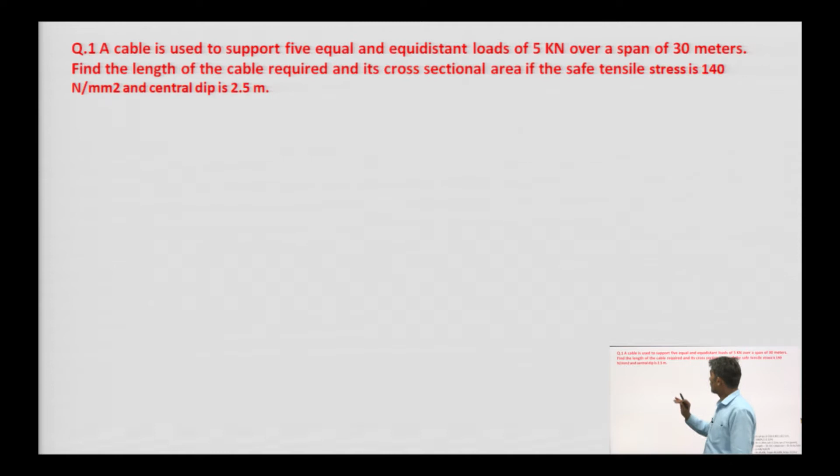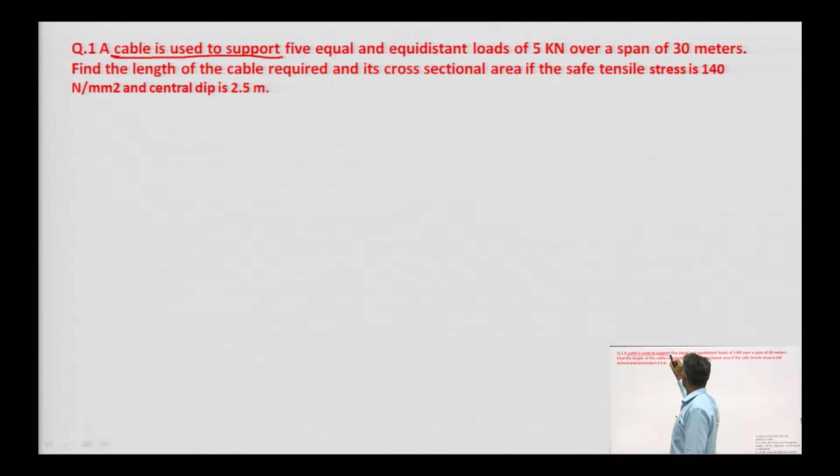In my today's lecture on the subject Structure Analysis, under the topic of analysis of cable, we will solve questions based on this topic. So, the first question of today's session is: a cable is used to support 5 equal and equidistant loads of 5 kilonewton over a span of 30 meter.

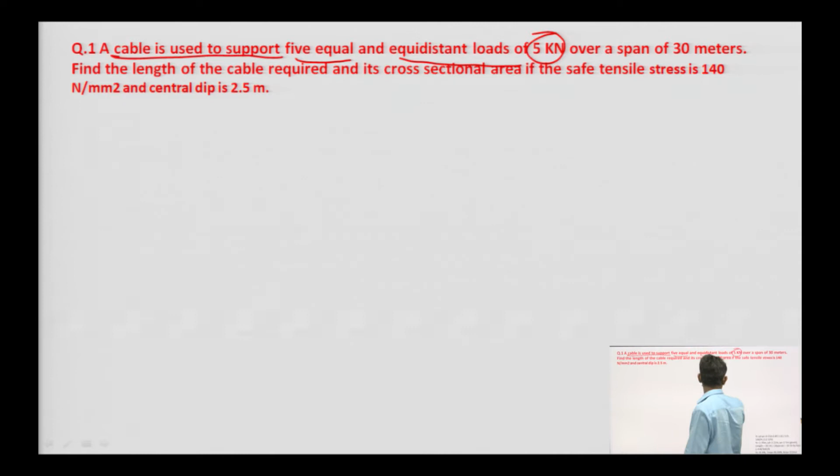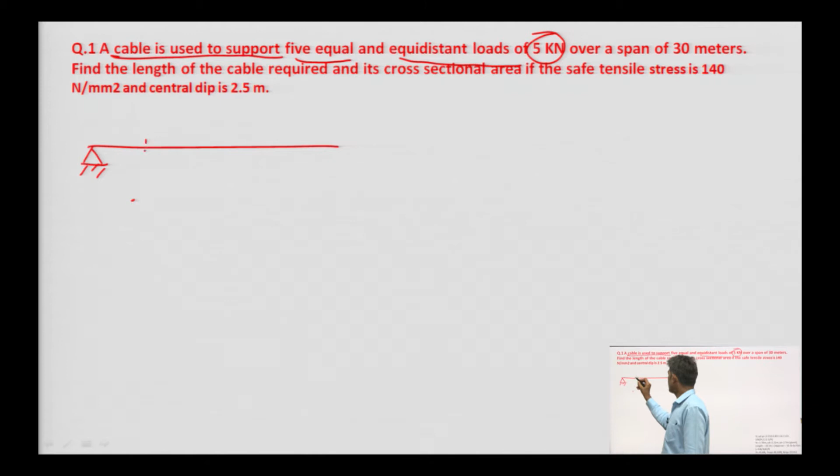Okay, over a span of 30 meters means we have a horizontal length, 1 2 3 4 5. This total length is how much? 30 meter. So, the value of every segment will be how much? 5 meter, 5 meter, 5 meter, 5 meter, 5 meter, 5 meter.

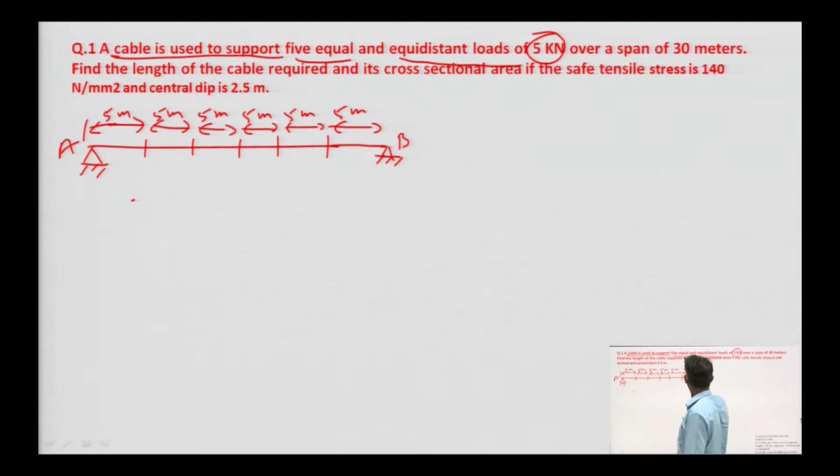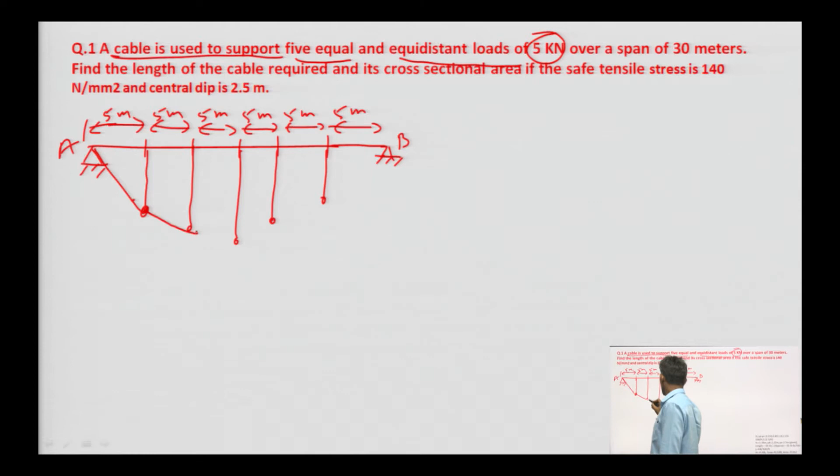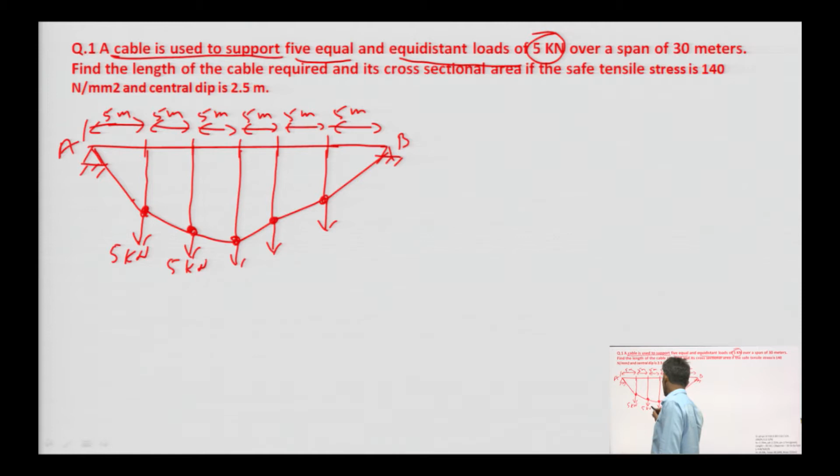So, at these points, 5 equidistant loads means first load, second load and third load. So, these are the loads which are hanging in this cable. So, this will be the shape, and the loads are 5 kilonewton each. So, this is the cable, location of the cable.

Find the length of the cable. We need to find the length of the cable for this arrangement of the loads. Say this is point A, B, suppose this point is C, this point is D, this point is E, F, G. So, what we need to find? The length of cable is equal to AC plus CD plus DE, multiplied by

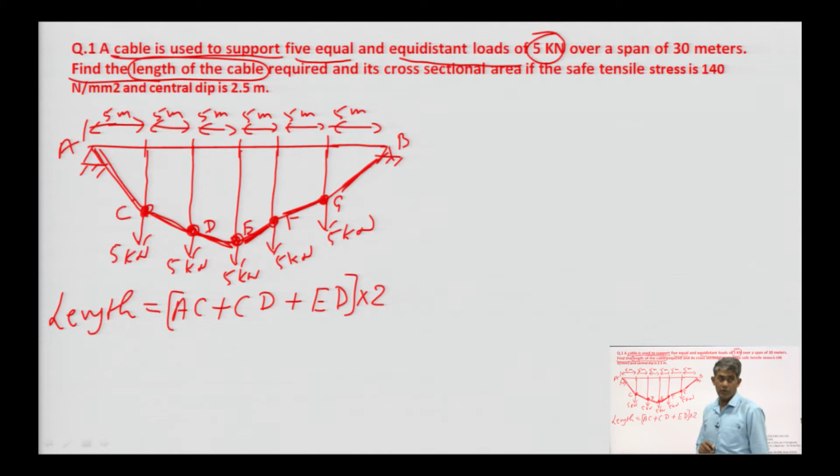2, because this one length will be same as for DE, and this one will be same as length CD, and so on. So, we need to find the values AC, CD and DE. The value of AC can be calculated if we can calculate this dip, suppose this is dip YC. So, AC will be under root of horizontal distance 5 square plus YC square. If we calculate YC, then the length AC can be calculated.

Similarly, what will be the value of CD? Value of CD will be under root of 5 square plus this one distance. Suppose this total length is YD. So, this one length will be YD minus YC, whole square. So, this will be the length of CD.

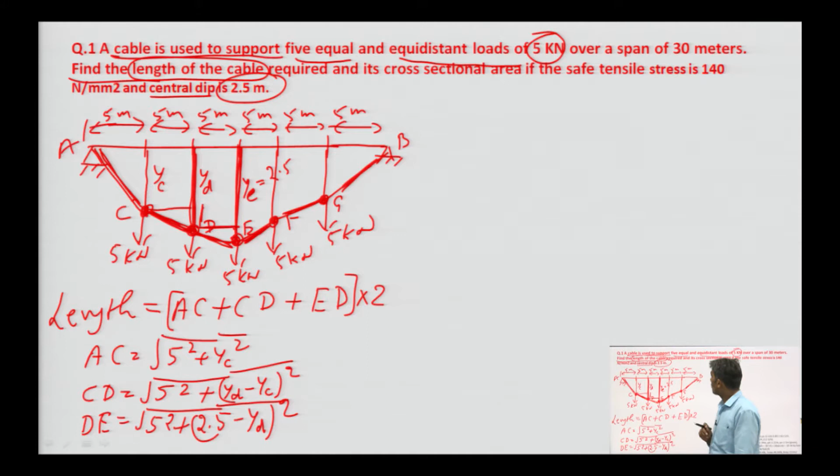Similarly, the length of DE will be under root of 5 square plus this difference. Suppose this entire length is YE, and this value YE is given in the question: 2.5 meter, the central dip. So, this is 2.5 minus YD, whole square. So, the length of the cable can be calculated if we know the values of YC and YD.

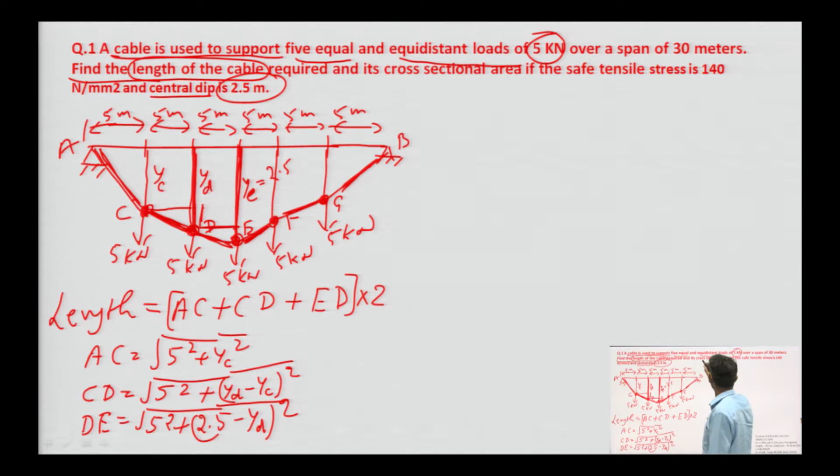After calculating its length, what we need to calculate here? Find the length of the cable required and its cross sectional area, if the safe tensile stress is 140 Newton per mm square. Let us first calculate the length of the cable.

We know that the bending moment at point C, D, E, F, G, or we can say at any point in the cable, is 0. So, we will apply bending moment at point C equal to 0, taking the left part. We will consider only this left part.

Here what will be the reaction? The vertical reaction VA, horizontal thrust H, and vertical reaction VB. VA and VB will be equal because it is symmetrical, and the total load is 5 loads of 5. So, 5 into 5 divided by 2 is 12.5 kilonewton. This is the vertical reaction at support A and support B.

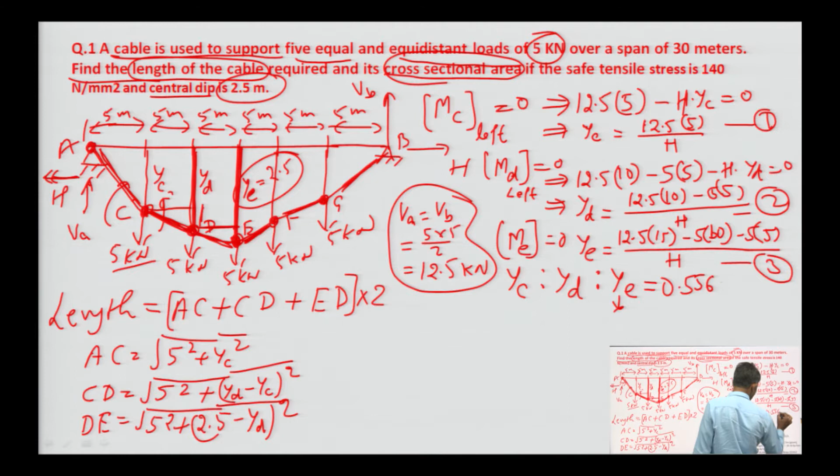So, we can calculate the ratio of yc to yd to ye with the help of these three values. H will be cancelled out. Actually, the value of ye is known to us, so this component we need to take as 1. With reference to that, we will have 0.556 is to 0.89 is to 1. That ratio we will have with the help of these three values.

With this equation, the values of yc and yd are known to us. It is very simple. Value of yc will be what? Because this is 1, ye is known to us, 2.5, multiplied by the ratio of yc. So, it is 0.556 divided by 0.556 plus 0.89 plus 1. And this gives 1.39 meter.

Similarly, the value of yd can also be calculated with this proportion, and the yd value is 2.22 meter. So, the value of yc is known to us, the value of yd is known to us. So, the values of AC, CD, DE are known, and by putting the calculated values of AC, CD, DE in this equation, we will get the total length of the cable, and that length will be 30.54 meter. So, this will be the length of the cable.

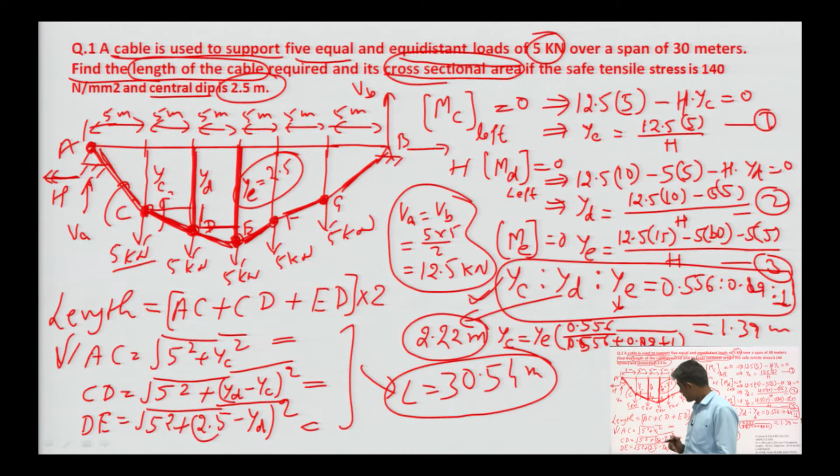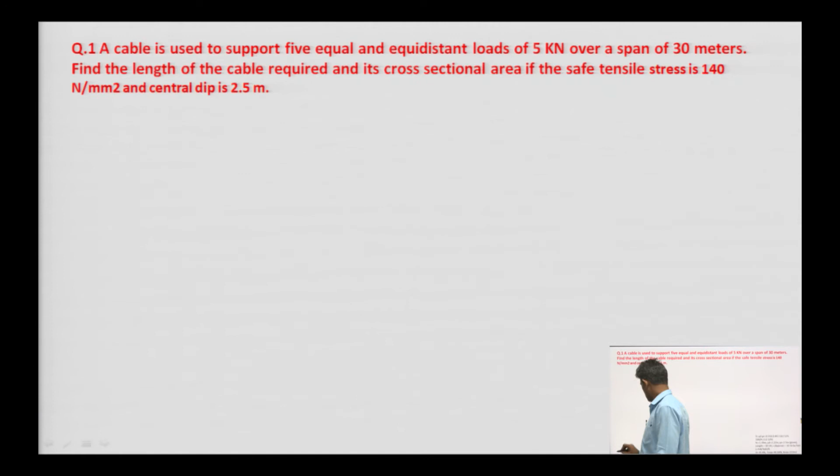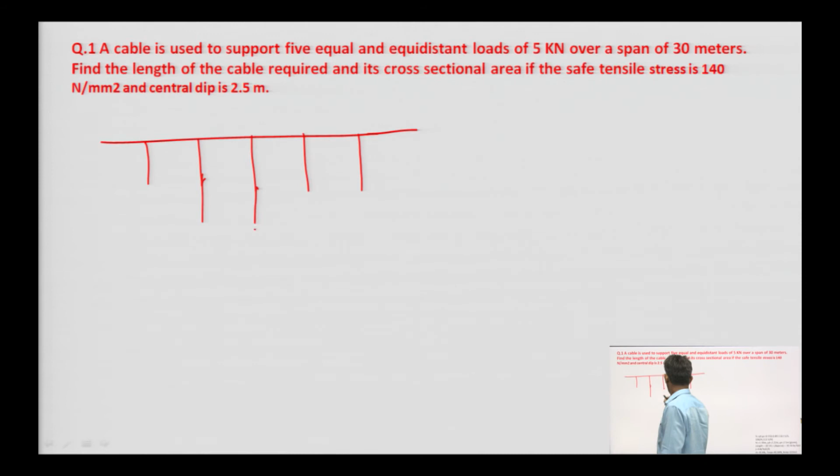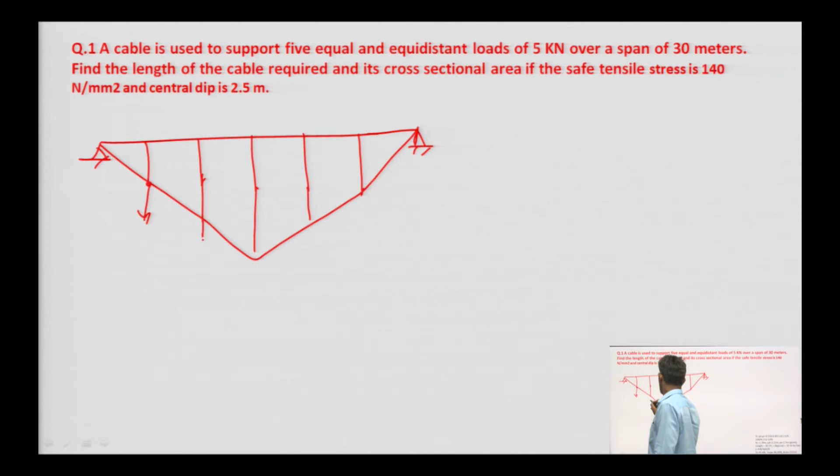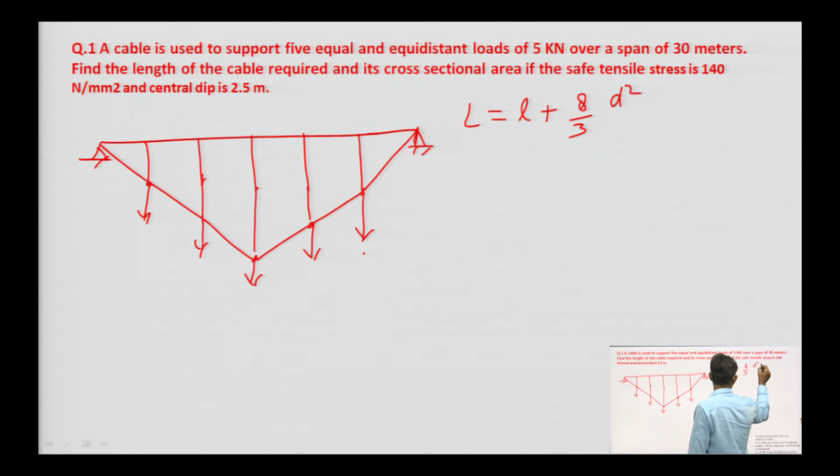So, length can also be calculated with the help of the formula. What is the formula? Length of cable is L plus 8 by 3 d square by L. This was yd. Now, this was A, B, C, D, E. So, this is ye, ye is 2.5. Taking d as ye, 2.5 meter, taking L as 30 meter, this value can also be calculated.

If this is calculated, it is 30.56 meter. So, without calculating the values yc, yd, we can have an idea of the length of the cable.

30.56, and prior to that we have calculated the value as 30.54. Okay, it is near about the same as we calculated previously. Okay, so use this formula.

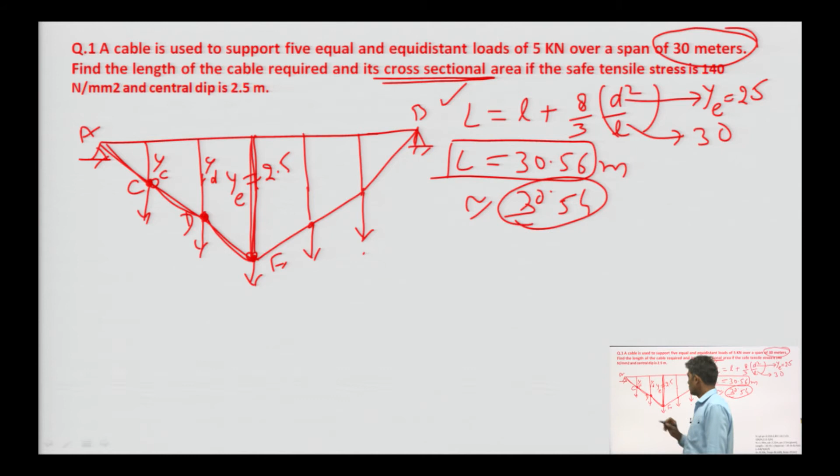The next thing which we need to calculate in this question is the required cross sectional area. So, reaction VA we have calculated as 12.5, this one 12.5. So the next thing is to calculate the value of H. To calculate the value of H, we can apply the equilibrium equation at point C. So, bending moment at point C equal to 0, which we applied previously. So, the value of H can be calculated from equation number 1.

What was that equation? That was 12.5 multiplied by 5 minus yc into H equal to 0. So, yc is known to us, yc has been calculated. So, the value of H can be calculated, and the value of H comes to be 45 kilonewton. By putting the value of yc, we will have the value of H as 45. Okay. H is 45 kilonewton. VA is 12.5 kilonewton.

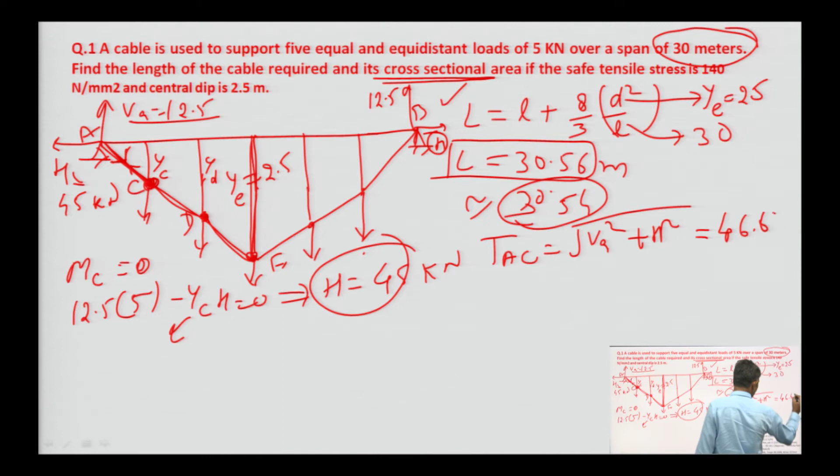So, the value of tension in cable AC can be calculated, and what will be the value? Tension in AC will be under root VA square plus H square. VA is known to us, H is known to us, then that value can be calculated, and that value is 46.6 kilonewton. Okay, you can calculate manually. And this value can be shown by this diagram also, means TA, tension at this support.

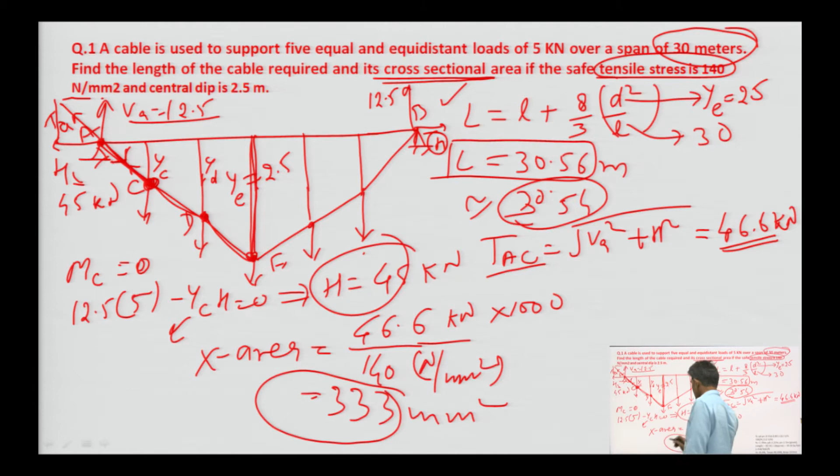And that value of the tension at support A will be the maximum. And in the question, the tensile stress is given as 140, and maximum tension has been calculated. Therefore, required cross sectional area can be calculated how? By dividing 46.6 kilonewton by 140 Newton per mm square. So, multiply here by 1000, then we will have the value as 333 mm square. So, this will be the required cross sectional area of the cable for hanging 5 equidistant loads of 5 kilonewton.

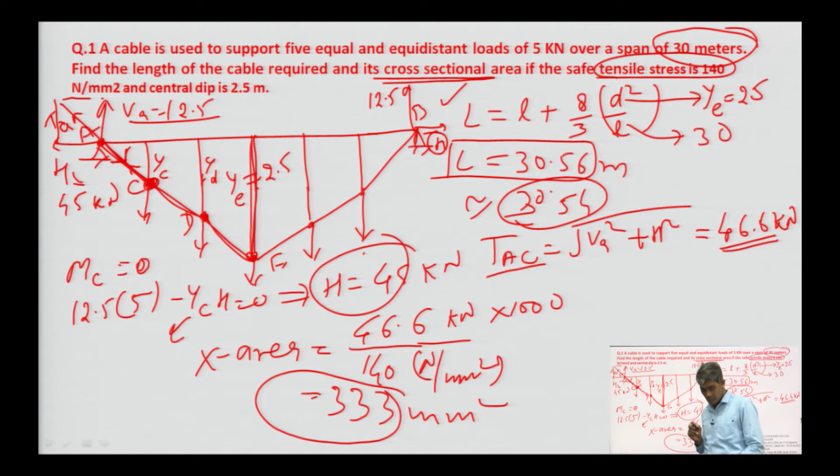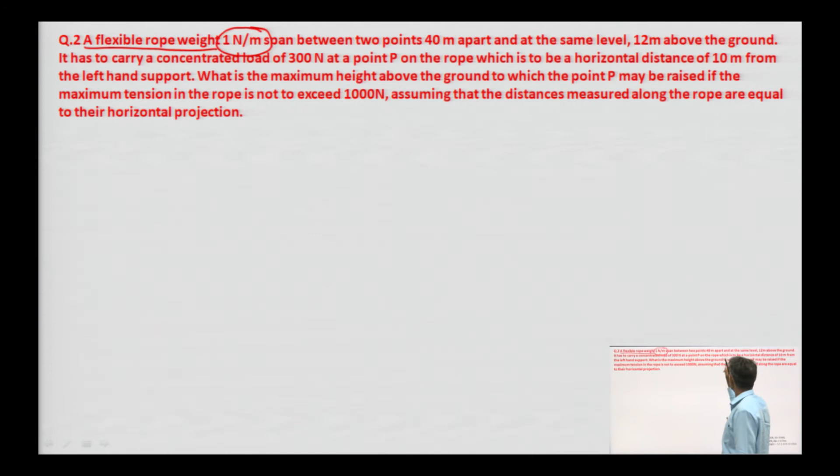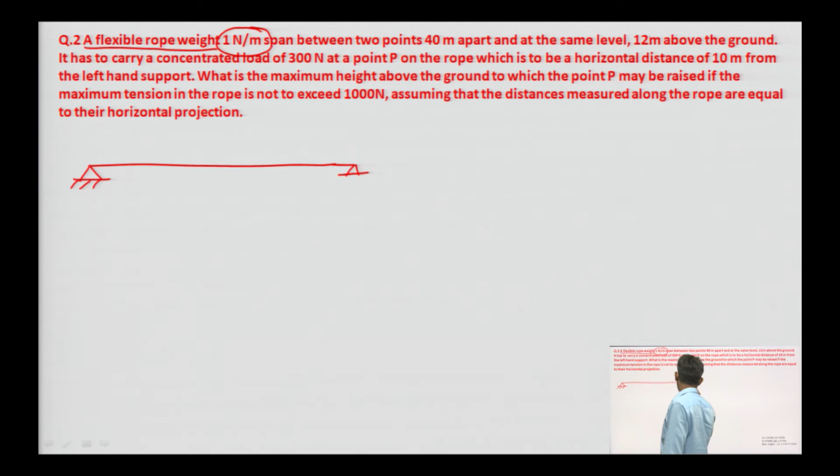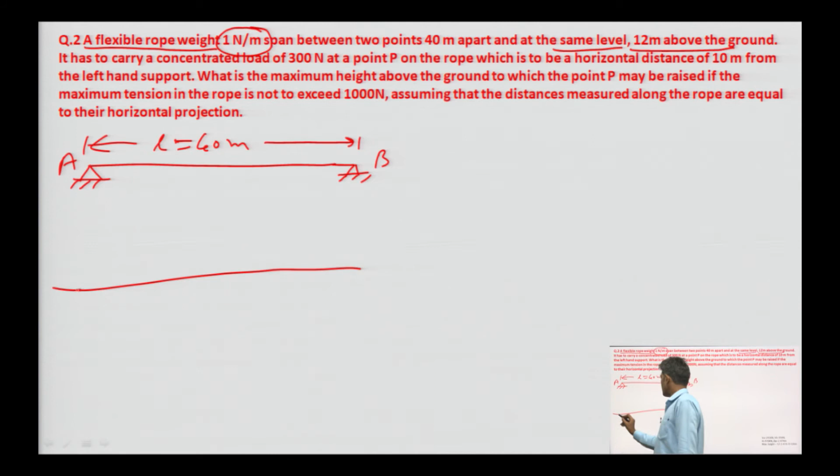Okay. We will move to the next question. In the next question, what is given? A flexible rope weighing 1 Newton per meter spans between 2 points 40 meter apart. Means the horizontal distance between the cable supports is given to us, L is equal to 40 meter, and at the same level. So points A and B are at the same level, 12 meter above the ground. This is the ground, and this total height is 12 meter above the ground.

It has to carry a concentrated load of 300 Newton at a point P on the rope, which is to be at a horizontal distance of 10 meter from the left hand support. Means from A, a point load has to be placed. And the value of this load P is 300 Newton, and the horizontal distance is given as 10 meter. Okay.

What is the maximum height above the ground to which the point P may be raised if the maximum tension in the rope does not exceed 1000 Newton? Means T max is given to us as 1000 Newton. We need to find this height. Suppose this is a small h. So, is something else given? No. Okay. How can that value be calculated?

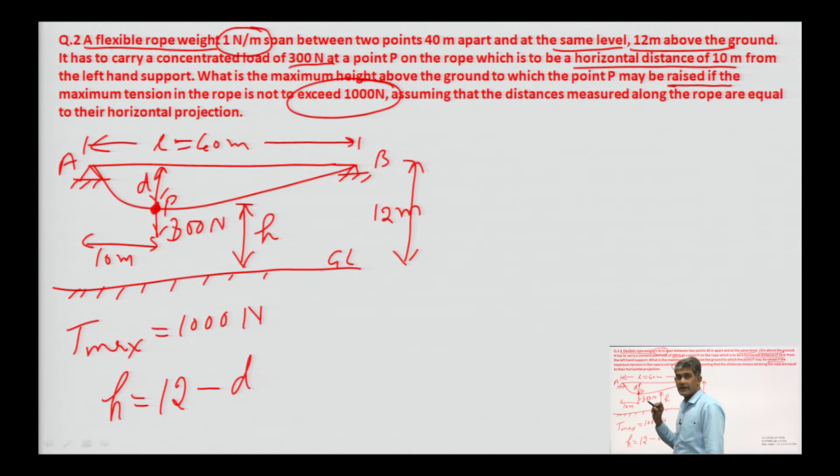So, the value of h can be calculated by the difference of 12 minus this central dip. If we are able to find the value of the dip at the point of concentrated load, then with the difference 12 minus d, we can calculate this height h, which is required in this question. So, which types of loads are there? First one is the point load, and the other is UDL, which is applied on this cable.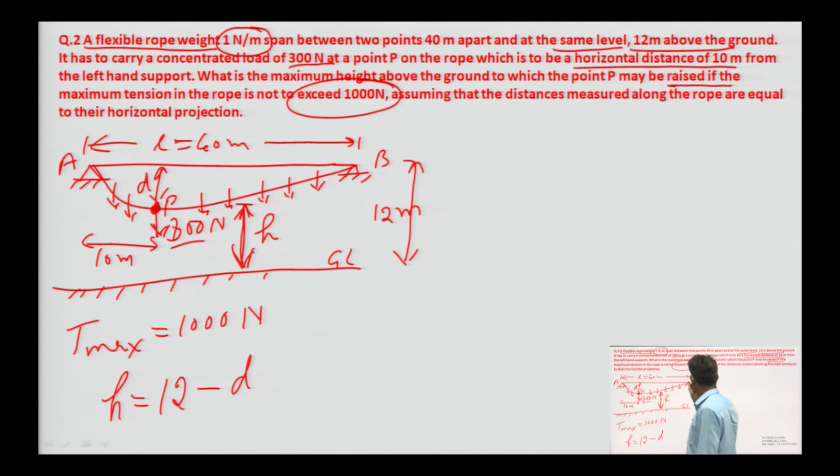So, first of all find the value of horizontal thrust and support reactions: VB here, VA here, H. Okay. First of all, find the value of support reaction.

Okay, apply equilibrium equation at point, applying bending moment sigma m about point B equal to 0. With this equilibrium equation, we can have the value of VA.

So what will be the value? VA multiplied by entire length 40, minus load is point load 300 and the perpendicular distance is 10, total is 40, means 30.

30 minus another load, we are applying bending moment at point B. Another load is this UDL of 1 into the remaining distance, 30 into 15, equal to 0. So with this we will have the value of VA as 245 kilo Newton.

VA value of 245 kilo Newton. So the value of VB can be calculated by 300 minus total load: 300 plus 40 minus 245, that equals 95 kilo Newton.

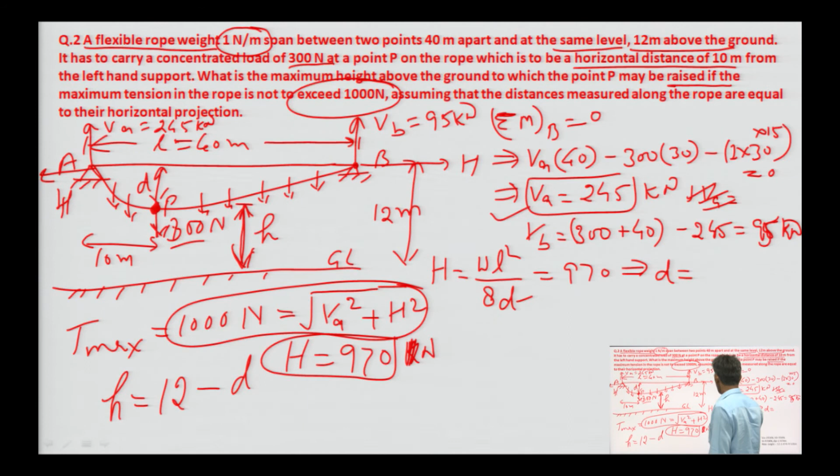W is known to us. No, we cannot apply this equation. Why?

Because this cable has the point load. We have the value of 970 H, no problem, but we will apply the equilibrium.

We will apply the bending moment MP at this point equal to 0, then we will get that formula applied. This formula will not be correct here.

So bending moment at point P, for left part only, equals to 0. What we will get? We will get VA.

VA value is 245 multiplied by perpendicular distance for moment at point P, it is 10, minus this UDL: 1 into total length 10 into 5, minus H into D, is equal to 0.

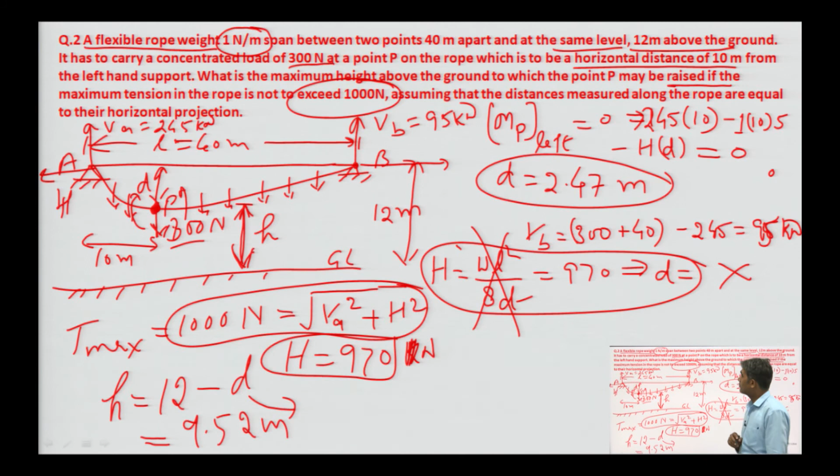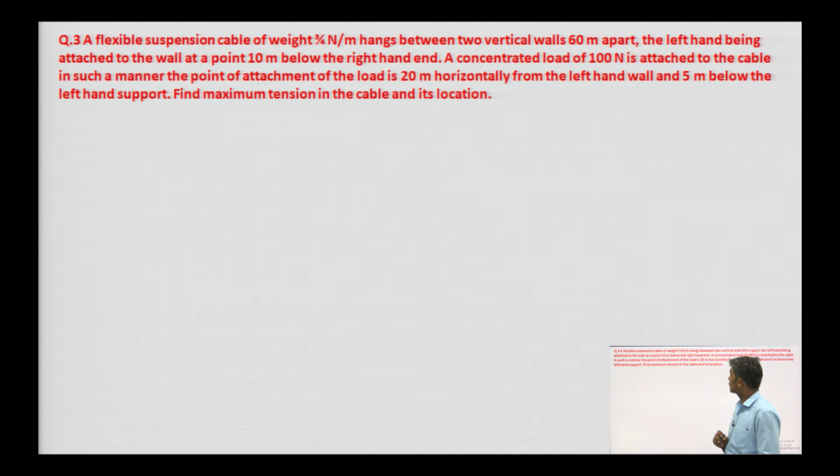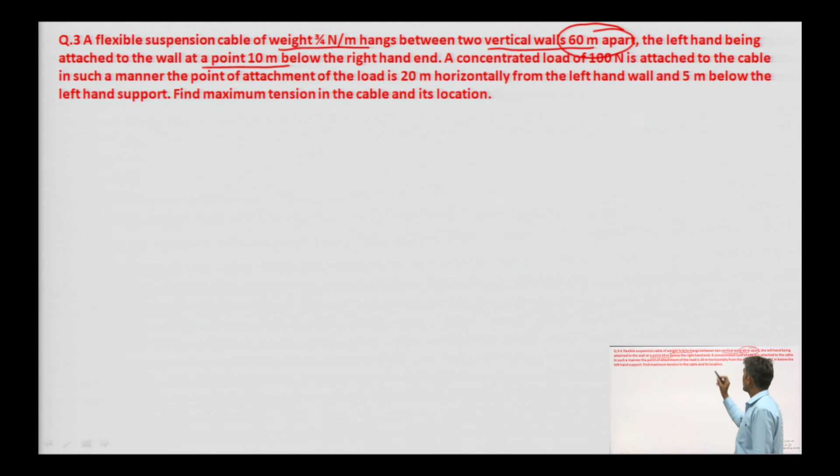Okay, this question: a flexible suspension cable of weight 3/4 Newton per meter hangs between vertical walls 60 meter apart. The left hand being attached with the wall at a point 10 meter below the right hand, meaning cable ends are at different elevation.

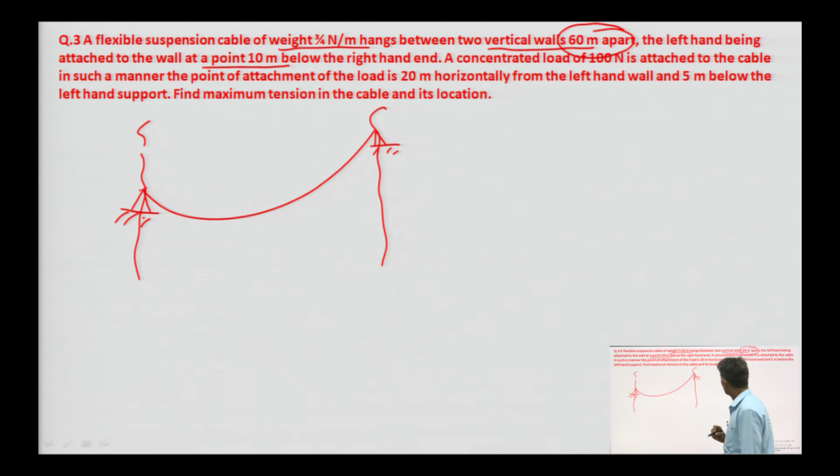Read again: hangs between two vertical walls. This one wall and this one wall. Left hand being attached to the wall at 10 meter below the right hand end. So this distance is 10 meter below the right hand end.

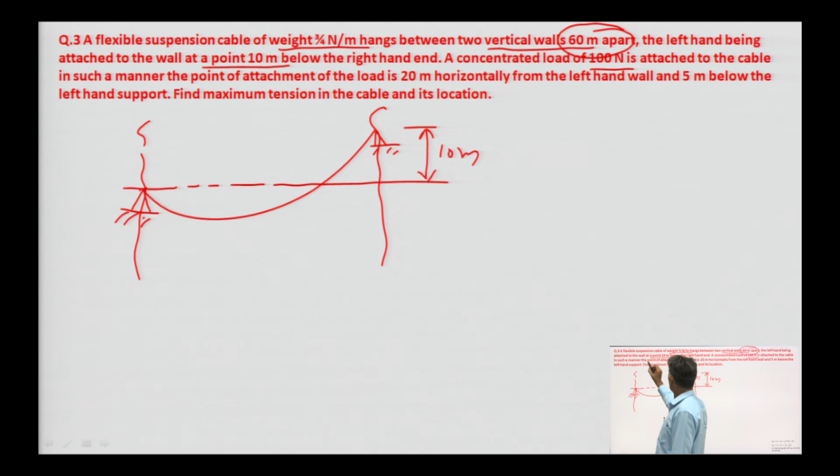The concentrated load of 100 Newton is attached to the cable such that the point of attachment of the load is 20 meter horizontally, out of this 60 meter, out of this L equal to 60 meter. A point load of 100 Newton has been attached.

And 5 meter below the left hand support, this distance is 5 meter below the left hand support. So this is the question: we have to find the maximum tension in the cable and its location.

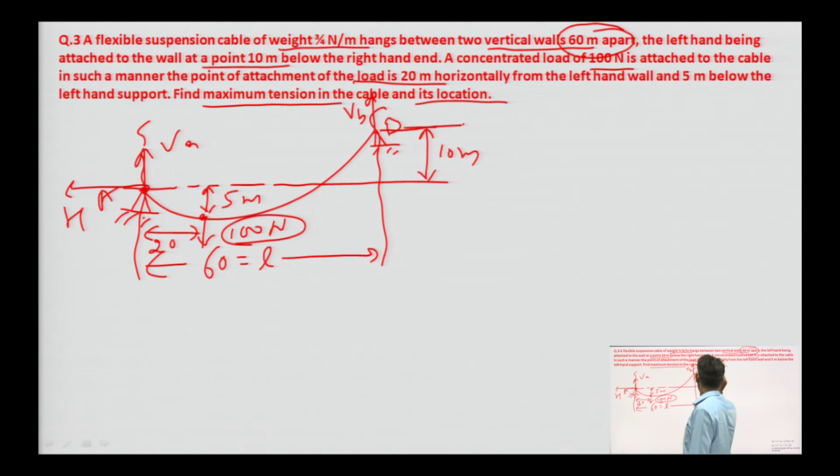So how we will calculate maximum tension? This is VA, this is H, here VB and H. So the maximum value will depend upon the value of VA and VB, because tension is under root of VA square plus H square. So if VA is more, then tension at point A will be higher. So calculate the value of VA and VB.

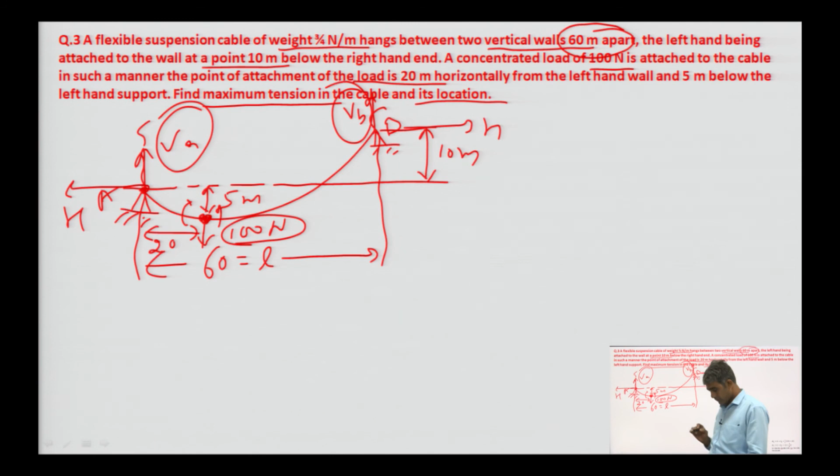So apply the equilibrium equation at point A and apply the moment at that point equal to 0, you will get it. We will discuss, we will continue in our next class.